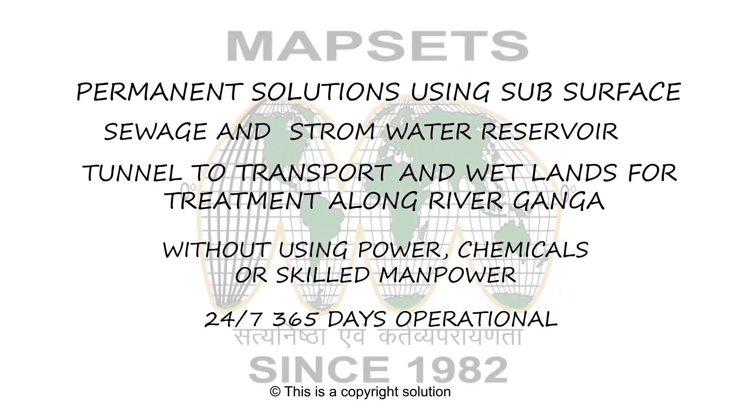This copyrighted concept will be customized as per the topography of all other cities. Mapsets brings a permanently sustainable solution to treat municipal, industrial and storm-water sewage using an engineered tunnel to transport the sewage outside the municipal city, and treatment using wetlands for cities and towns on the banks of River Ganga without using any power, chemicals or skilled manpower. Operational 24/7 and 365 days.

Mapsets' basic philosophy is to collect all types of wastewater, including storm water, into an underground tunnel reservoir. This underground tunnel will connect the existing sewage network and enable the least amount of sewage blocking, which will drastically reduce sewer maintenance and at the same time eradicate surface water logging. With no water logging, the other infrastructure like roads and other utilities do not get annual seasonal damages. The underground engineered tunnel reservoir will use no power to transport all the surface water sewage outside the city. This will gather huge carbon credits.

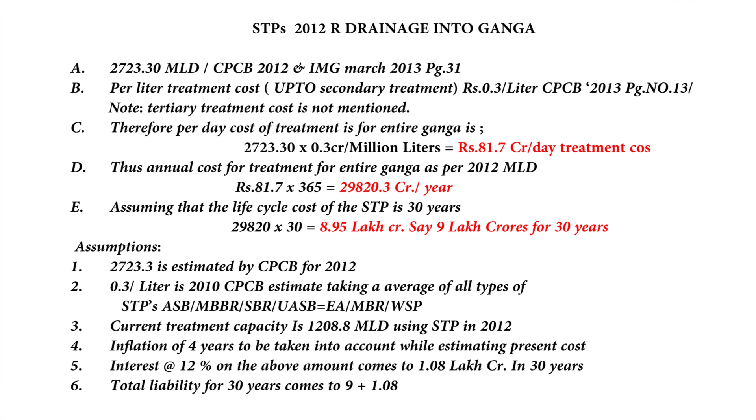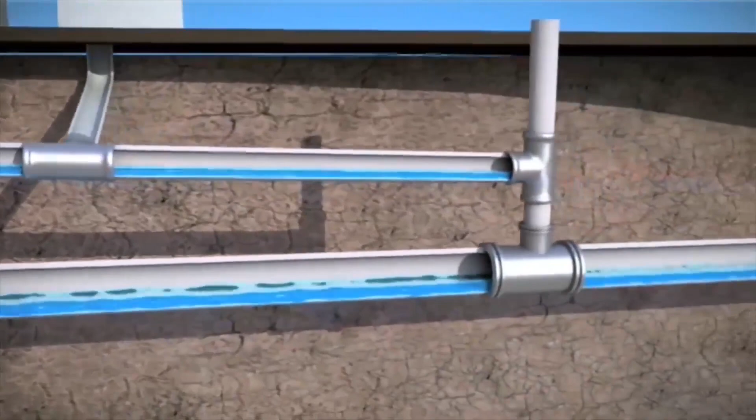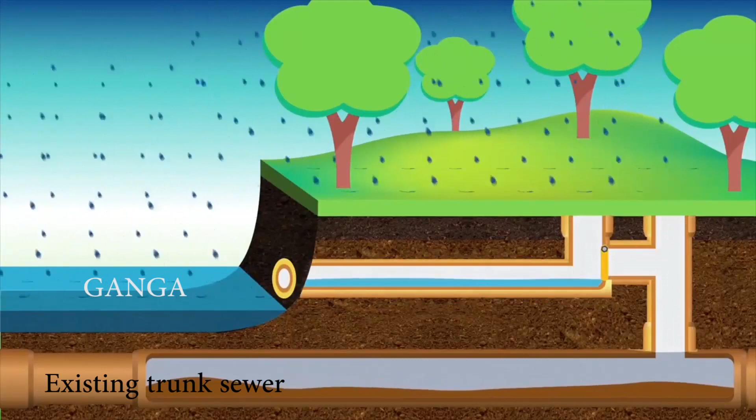At present, 80% of the water supplied in households and industries is drained into the sewage network system, which connects to a trunk sewer having underground screening chambers to filter the solid waste. This is transported using gravity or pumping to a sewage treatment plant. The pipe network gets choked during rainy seasons due to sludge and solid waste and design flaws. When the trunk sewer overflows, the untreated sewage empties itself in the lowest height of the River Ganga.

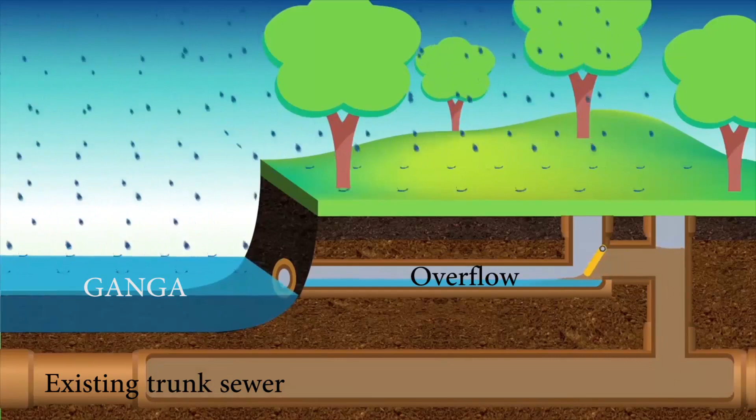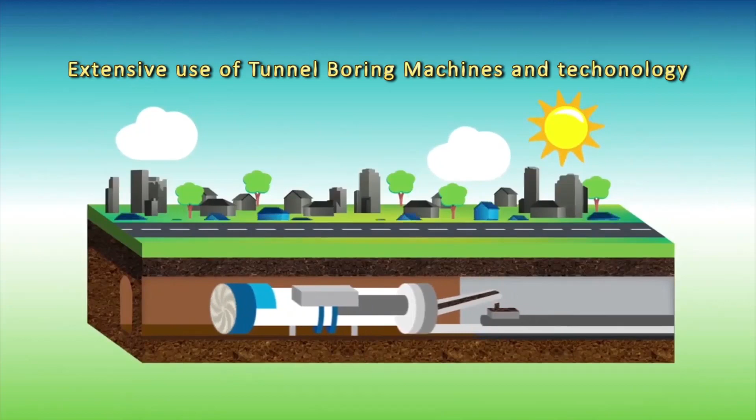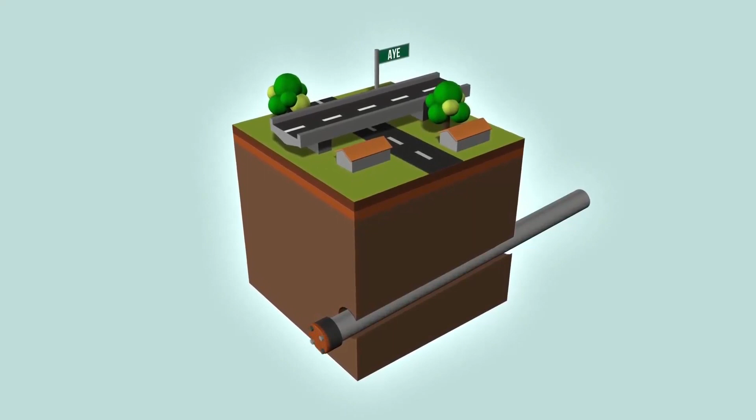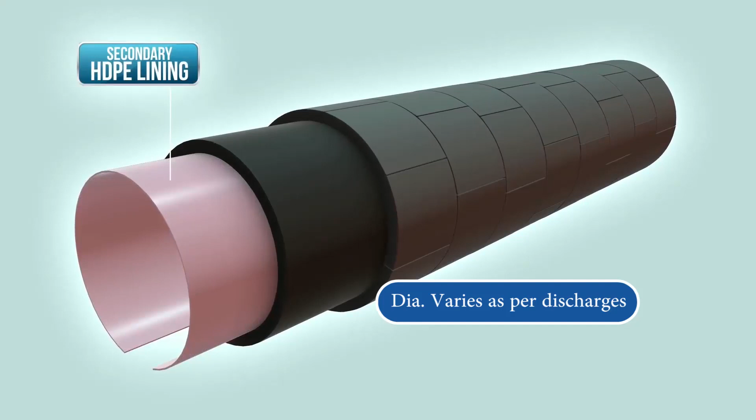Mapsets has proposed using tunnel boring machines. This tunnel reservoir will be designed as per the projected MLD of 100 years. If the topography permits, the tunnel can be constructed below the River Ganga to service the city on the opposite bank. There will be no disturbance on the surface during construction. It can be carried out during rainy seasons also. The tunnel will be a precast, section by section, 3-layered tunnel casing. The innermost lining will be of HDPE non-corrosive material and optical fiber to monitor the flow and maintenance cycles.

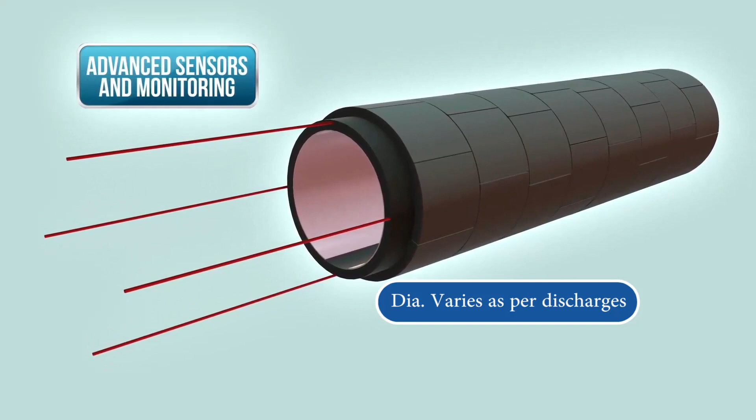The diameter of the tunnel will vary from 4 to 6 meters depending on the discharged MLD, the topography and the pressure needed at the start of the wetlands. Average cost of construction of the tunnel will be Rs 50 crores per kilometer, and it will be tunneling approximately 30 meters per day. There will be vertical shafts to maintain and clean this single structure. There will be additional bypass structures planned which will have easy accessibility from the top. The design will be such that most sludge will collect only in these sections of the tunnel.

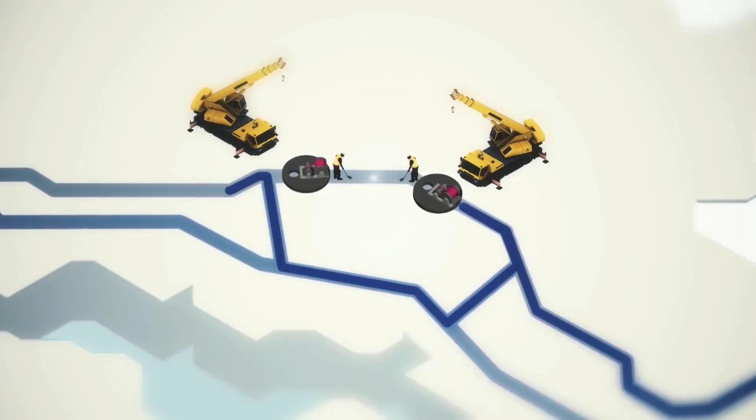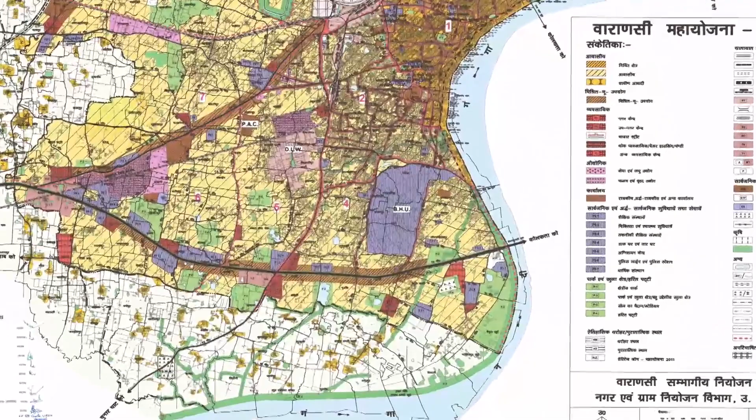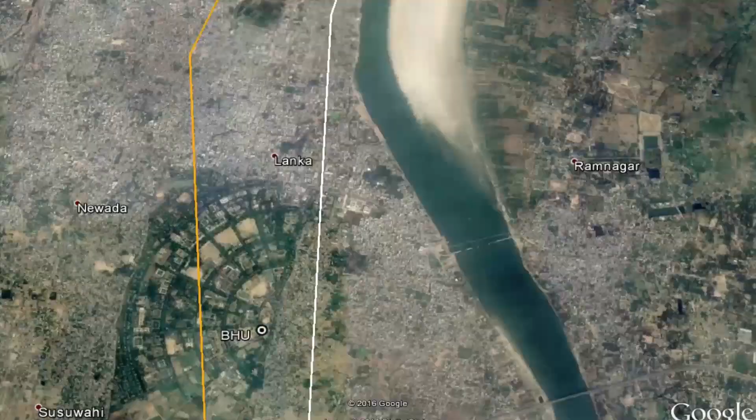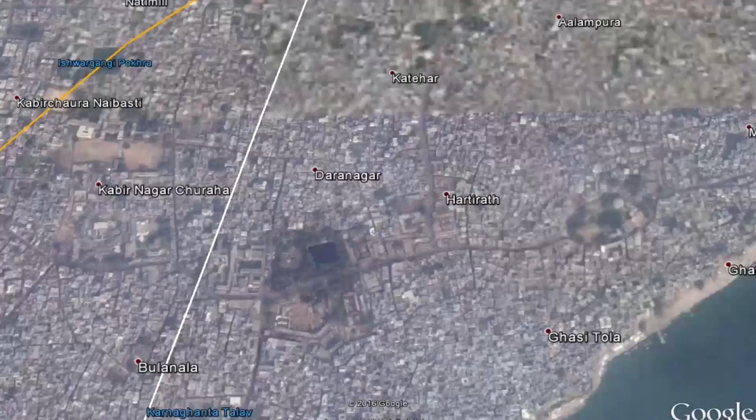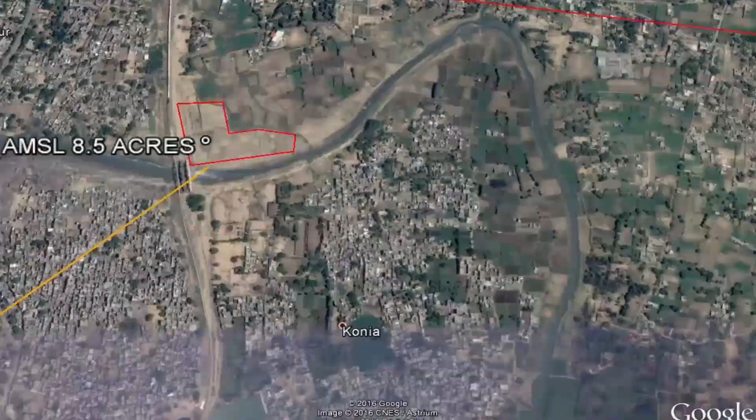A study of the Interministerial Group report of March 2013, according to which Varanasi has a total area of 10,058 hectares, the unsewered area is 8,432 hectares. There are 23 drains emptying raw sewage into the Ganga River. 84% of the municipal area is without any sewage network. The latest figures indicate a discharge of approximately 300 MLD in 2017. There are a total of 20 square kilometers of wastelands in the district.

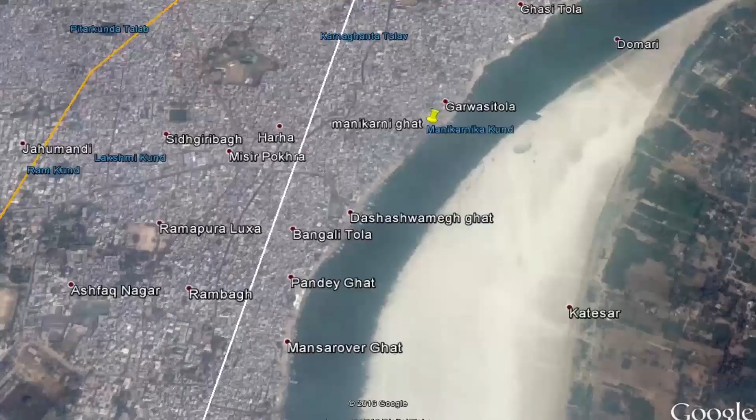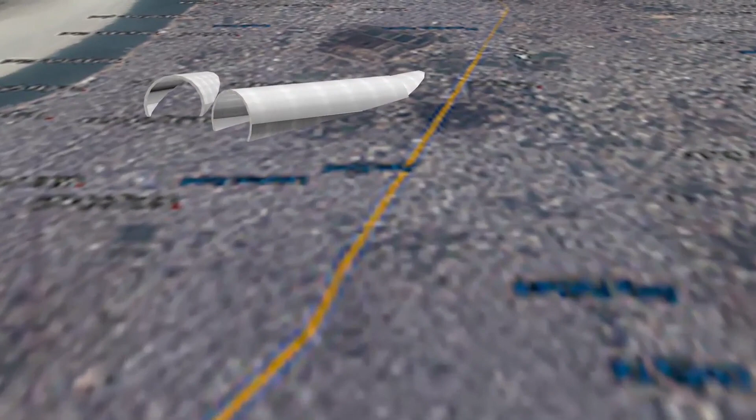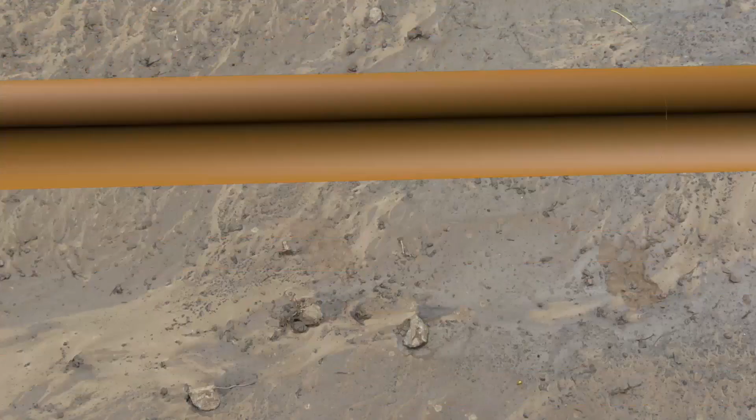The ancient city of Varanasi is very densely inhabited. The proposed engineered reservoir needs no gradient and has the other opening on the north of the Gomti riverbed. There are two areas identified of 7 acres and 8.5 acres each. In case these lands are unavailable, the tunnel can be taken further to a place where land categorized as wastelands as per the Wasteland Atlas can be allocated to make the wetlands.

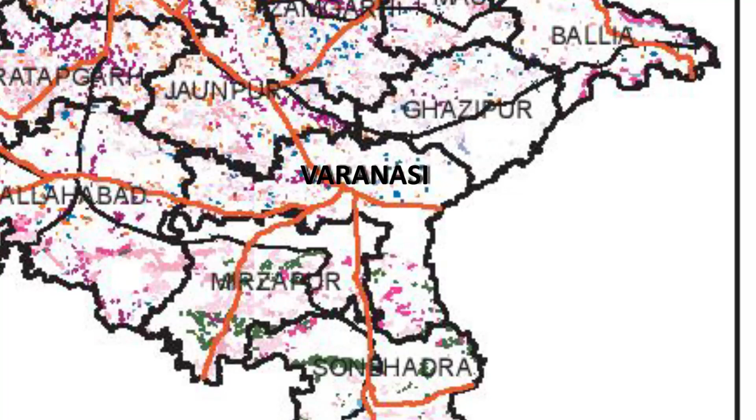The following simulation is for schematic representation only and the IPRs are owned by their respective owners. The tunnel and the wetland are uniquely designed for each city. The discharge and pressure for a wetland are maintained inside the smart tunnel reservoir. A revenue generation model with a break-even of 12-15 years through production of particle boards etc. is inbuilt, which will reduce tree cutting, apart from providing a huge employment opportunity.

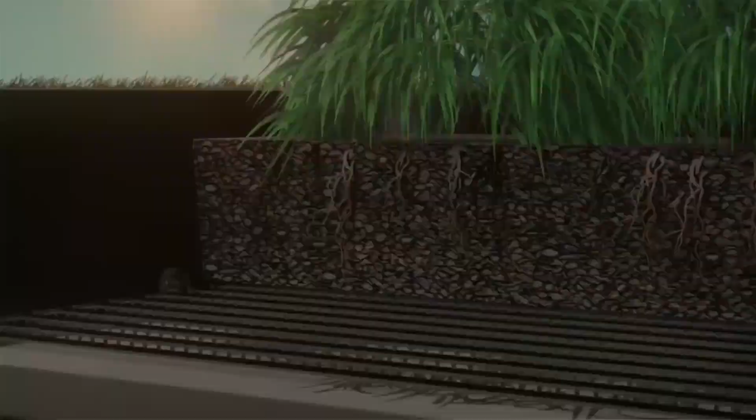Constructed wetlands are a viable treatment alternative for municipal wastewater and numerous studies on their performance have been conducted. A well designed constructed wetland should be able to maintain the wetland hydraulics, namely the hydraulic loading rates and the hydraulic retention time, as it affects the treatment performance of the wetland. We propose to use a wetland process where the sewer flows through surface settlement tanks and then moves into the wetland cells. These cells are constructed to undertake a horizontal subsurface flow of sewer through grit and Typha vegetated tanks.

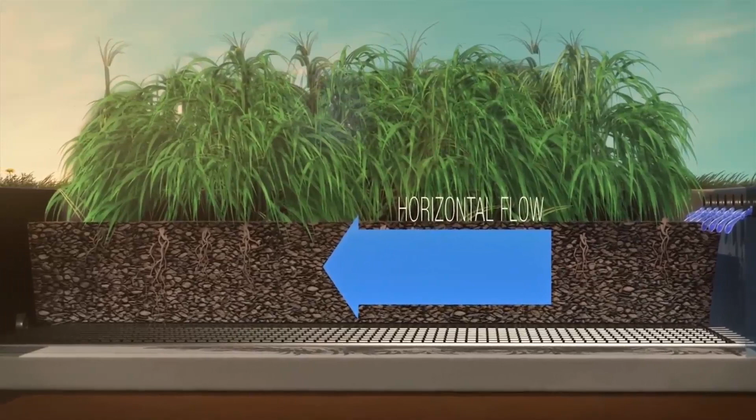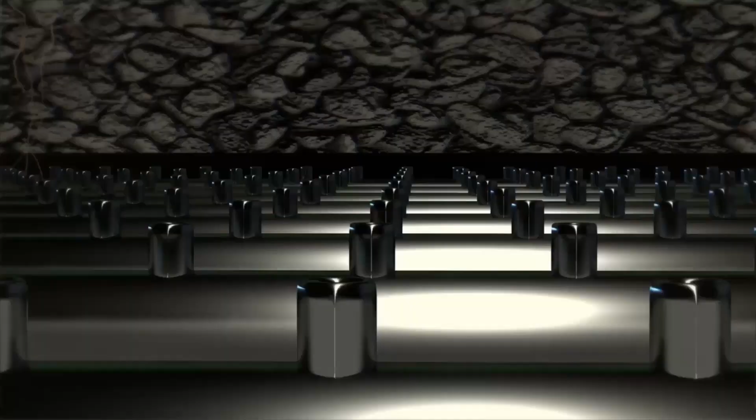A filtered system has 3 stages or zones. There is an inlet area where water flows through crushed bricks and stones. Then, water enters a treatment zone in which the same media are used, but in which the different plants are located. The water then enters the outlet zone. Once treated, the effluent can be used for irrigation and fisheries, or just drained into the Ganga to maintain the environmental flow.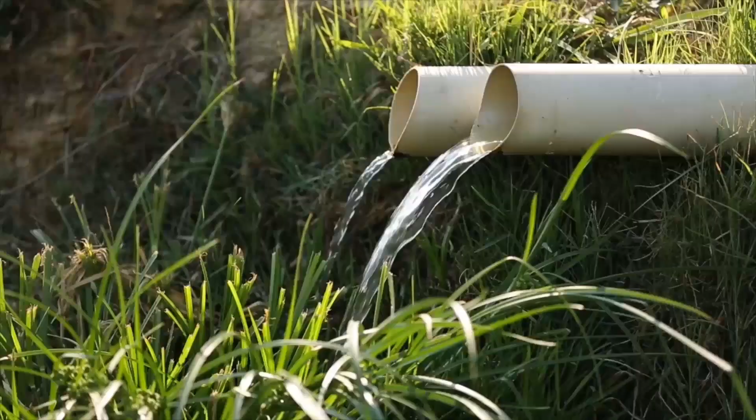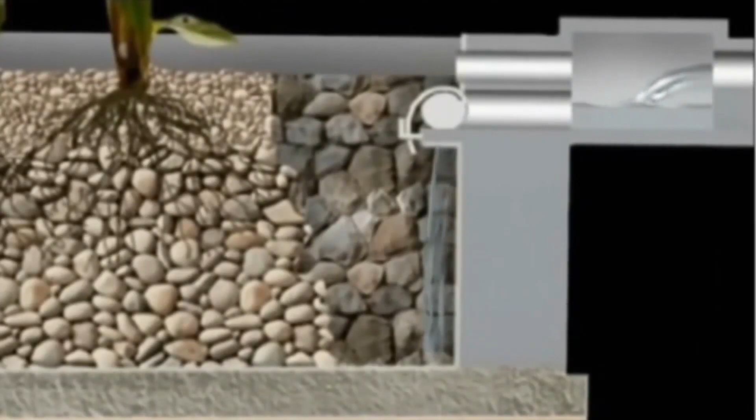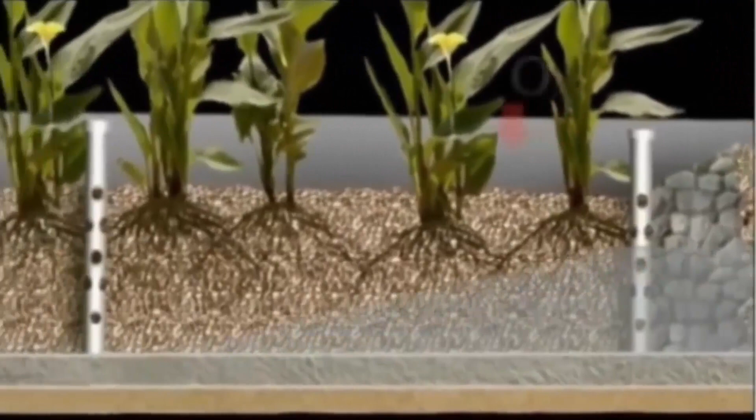Prototypes of wetlands made on a smaller scale yet cleaning approximately 1 MLD sewage in approximately 2 acres have resulted in just 1% energy requirement, 0 chemical application, 0 sludge generation, 50 to 65% reduced treatment cost, no skilled manpower requirement, harvested biomass is transformed to particle boards, and waste to power generation. It has a life of 100 years.

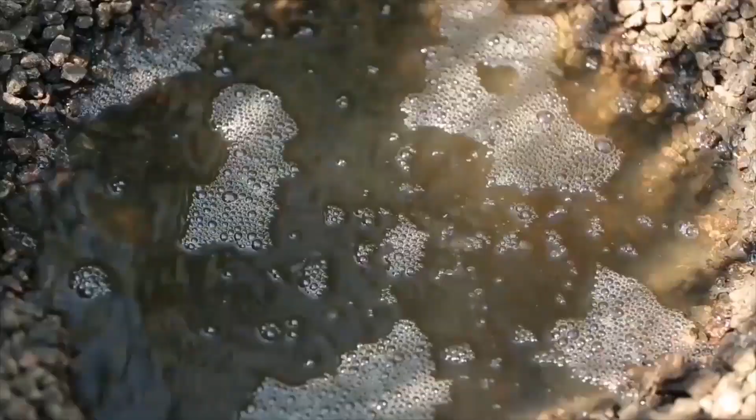They bring down the BOD to less than 10. TSS 99% removed, pathogens 99% removed, fecal coliform 99% removed, iron 99% removed, chromium 99% removed, lead 99% removed. The most important aspect in comparison to the power and technology hungry STP is that these wetlands bring in huge carbon credits to India.